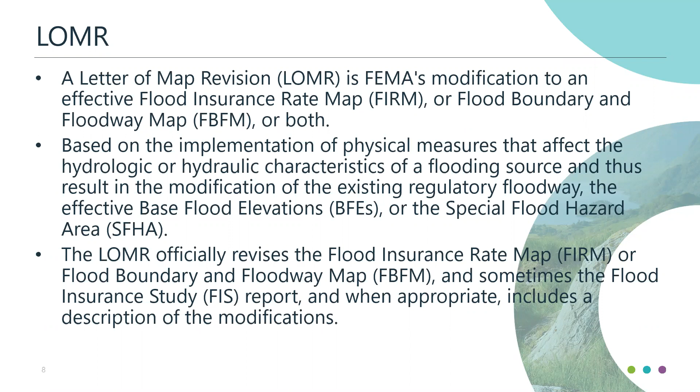A CLOMR is the other revision type, and it's a conditional letter of map revision. And basically what that application process is, it provides the ability for FEMA and the community to comment on a proposed project before anything is built, to make sure that it meets FEMA's regulatory requirements, the community's regulatory requirements, as well as the state's regulatory requirements. It's an important process because nobody wants to go out and do a lot of work, spend a lot of money just to find out that they're non-compliant. So a CLOMR is a very important piece of that.

If you're doing fill within a floodway, a CLOMR is absolutely a great step to make sure that you're going to be compliant before it's actually built. One thing to note with a CLOMR, just like a CLOMR-F before, a CLOMR being conditional doesn't actually revise anything. All it does is indicate whether or not that project, if you build it as you proposed, would be recognized by FEMA and could be approved once you do a LOMR. So the process generally would be to do a CLOMR first, get that approved, build it as you said you would, and then file for a LOMR and get the LOMR approved so that it physically changes the map.

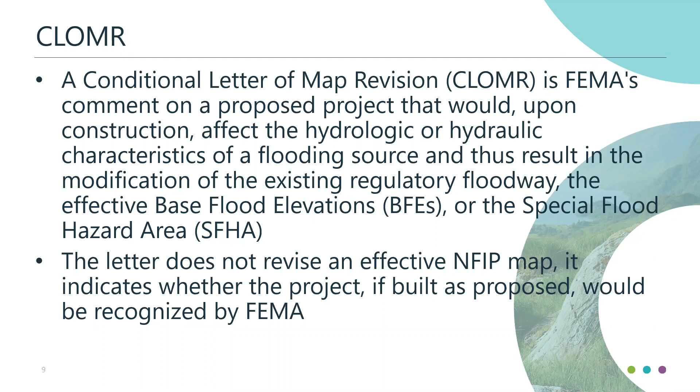Yesterday, I showed this table that depicts the different types of applications. The MT-EZ was a LOMA only. As some of you may recall, a LOMA is for those properties or structures that have not been placed on fill. They're at grade. And then the MT-1 applications that we talked about yesterday, those are all amendments, meaning they don't physically change the map. And those would include the LOMA, a CLOMA, a LOMR-F, or a CLOMR-F.

And just as a refresher, the LOMR-F is a letter of map revision based off of fill. In other words, it's a letter of determination determining whether a parcel of property or a structure on which fill was placed after the effective date of the floodplain would be above or below the base flood elevation.

Today, we're going to focus on the MT-2 applications, which are revision type applications. They physically change the map. And we're going to talk about LOMR and CLOMR specifically. PMR, as you might recall from yesterday, is a physical map revision, which is similar to a LOMR in its nature, except that it's at a larger scale. Multiple counties, large watersheds, things of that nature. I'm not going to focus heavily on the PMR process. If you have questions about the PMR process, I would encourage you to talk to Tara, Joanna, and Steve, the KDA folks, about that process.

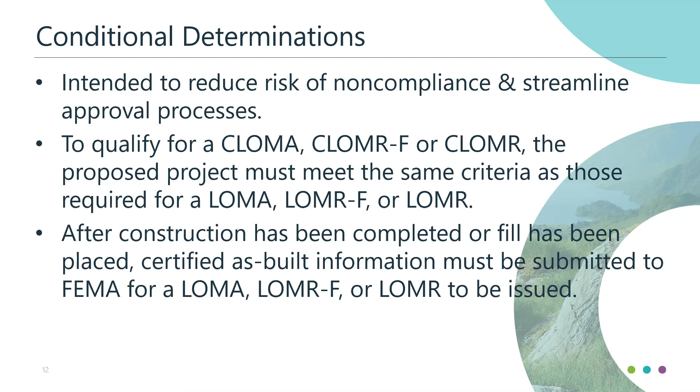How much does that application cost? As you can imagine, since we're talking about physically changing the maps, there's more review required of the hydrology, hydraulics, any structure information that you're putting in there, or specialty flood control item, whether it be a levee or a dam. Those types of things require more stringent review by FEMA and their partners. And so you can see here that they're quite a bit more expensive.

The CLOMR based off a new hydrology, bridge, culvert, channel, or combination thereof, is $6,500 to submit that application via the online LOMC tool that we talked about yesterday. If you are doing a levee or berm activity, the review cost of that activity goes up by a little bit, $7,000, but they also charge $60 per hour.

And the best way I can explain that $60 per hour is if you're dealing with levees or dams, there is a lot more involved with making sure, and we'll talk about this in a little bit, you're abiding by 44 CFR 65.10 levee requirements or dam flood control requirements. And so they actually will charge you on an hourly basis for review time on any of those type of applications, in addition to the $7,000.

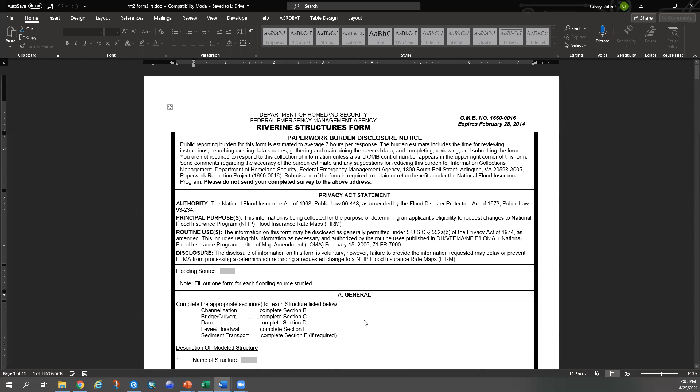Okay, none. Riverine structures. So our example doesn't have any riverine structures, but I'll just go ahead and walk through this. Flooding source is as it sounds before. Depending on the type of activity that you have, there are certain sections that you complete. So if you've got a project that includes channelization and bridges, then you could put those in here and you can select both of those as items, and then you would have to complete section B and section C of this form.

Name of the structure, what type it is. We kind of already went over what the types are and where they're located. Make sure to talk about what the upstream and downstream limits are of that chain. So if you're doing channelization, then you'll want to put the cross sections upstream and downstream where they start and stop. If you're doing bridges, you want the upstream cross section and downstream cross section placed there. And then similar to channelization, levees, upstream and downstream cross sections of those limits.

If you have more than 3, then you need to do another form for those other activities. And if you have a lot of them, you may want to just do one of these forms for each activity so that they're all accommodated. So for channelization, same information there. You talk about what the channel was designed to carry and/or what your frequency event.

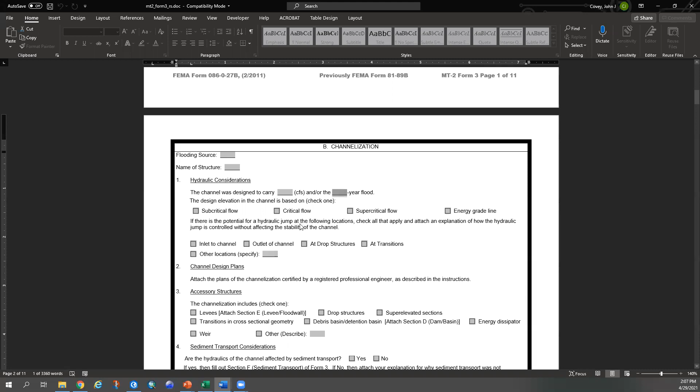There's a lot of engineering stuff in here that I'm not sure I want to get into for this crowd, but you check the different flow regimes. You talk about if you have a hydraulic jump in the modeling, check all those and how you're affecting stability of the channel. So you'll check all those. Make sure you put in the channel design plans. Again, that was in our little table before. So if you're doing a proposed project, you want the design plans included.

Usually if you have like a channelization and you have a sudden hydraulic jump where you have some stability issues, you may have other things like a drop structure or some other transition between cross sections or something to stabilize the channel. So you would check any of those that are applicable. Again, make sure they're included in the design plan so that they can review them. Sediment transport, again, if you have a lot of sediment transport in your study area, checkbox that.

Bridge culverts, this revision, it reflects if you're changing a bridge or culvert that wasn't modeled. So if you're adding one that wasn't modeled previously, you put it there. If you're modifying one that was in the FIS, you checkbox that. Or if the bridge hasn't changed, but you're revising how it's analyzed, you would checkbox this one. Put in the hydraulic model that you're using to analyze the structure. And then all this other information comes from your design plans that you fill out, especially anything that is changing. You'll want to checkbox all those. Sediment transport again.

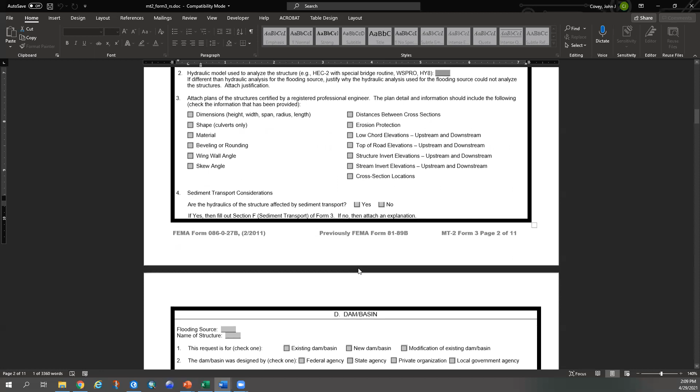Dams, so you have an existing dam that you're modifying, you're putting in a new dam or modifying an existing dam, whichever is applicable. So if you have an existing dam that was missed and you want to include it, that would be this one. If you have a new one, you go there. If you're modifying an existing one that was previously mapped, you checkbox that one. The dam/basin was designed, so who designed it? Checkbox that.

Usually if you're doing a dam, a lot of times you're revising hydrology, so you checkbox yes here, but sometimes not. Maybe the dam was already there, you're updating the dam somehow, but for whatever reason it doesn't change hydrology, you would check no. And obviously if you checkbox yes, you better have form 2. Was the dam designed using critical duration storm?

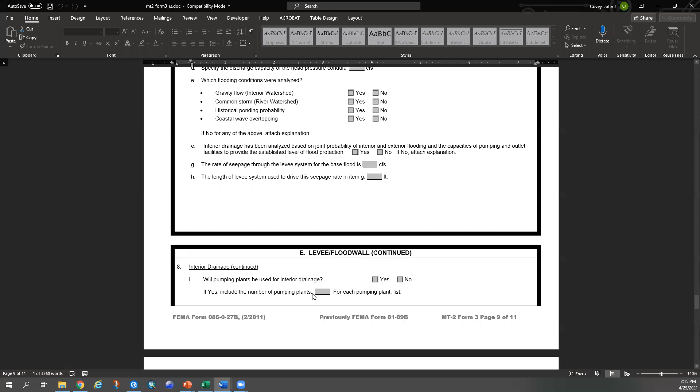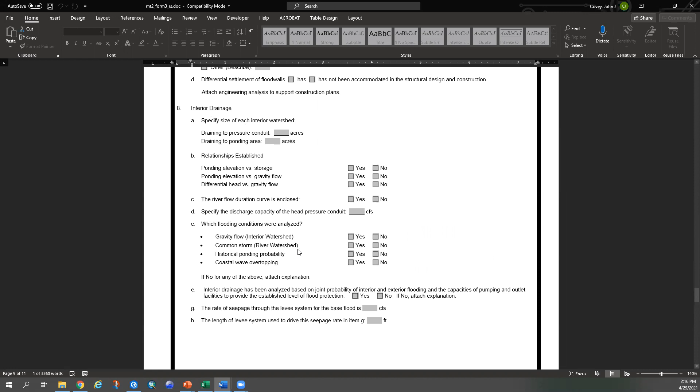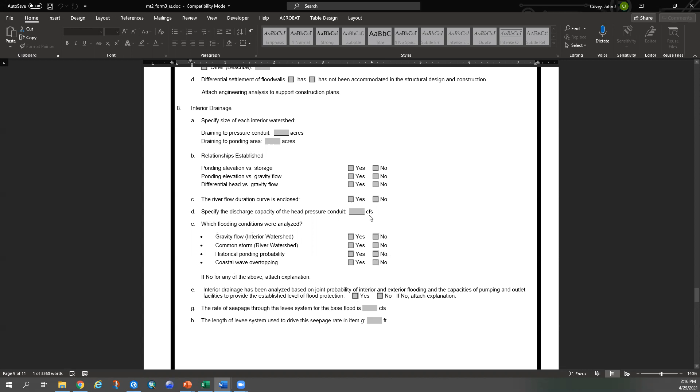Oh, one thing that's often overlooked is interior drainage with levees. That is a requirement. If you are changing even something in the channel part, maybe you're adding a little check dam or something, if it changes the riverine condition, you'll want to make sure to understand how the interior drainage is impacted. And interior drainage, basically, they're required per the CFR to map all the interior areas of the levee system, because if the pipes are closed, they want to understand what's at risk. So anything that changes that potential risk, they're going to want documented. That's what this section here is for.

And then there's the sediment transport finally at the very bottom there. Are there any questions about this form? There's a lot of technical stuff in here.

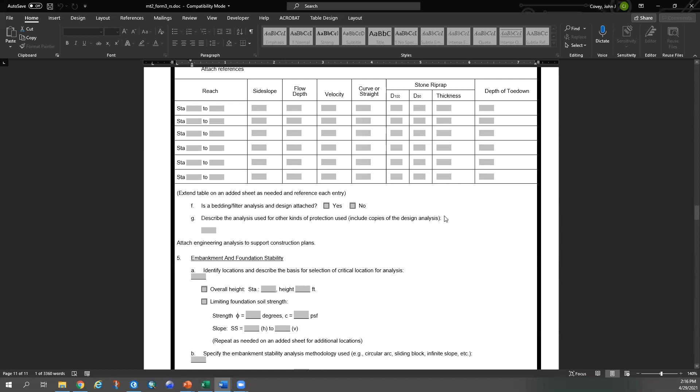Okay, hearing none. That was the last form that I wanted to go through in detail. Just know that there are the three other forms, the coastal analysis and those other ones. They're not really applicable to Kansas, so I don't want to spend a ton of time going through those, but they're here, and just know that they exist.

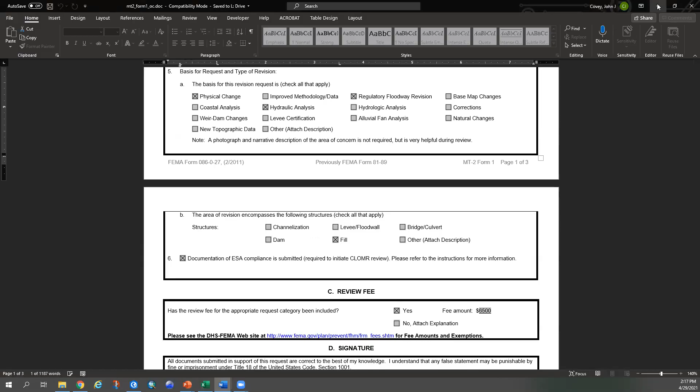If you're doing a snail mail option for the submission, this is where you would send it to, similar to the CLOMR-F and LOMR-F, LOMAs, or you can do it online, and it's usually quicker to do it online, as we talked about previously. You just have a lot more data to upload because you're uploading models, you're uploading design plans, you're uploading a lot of information.

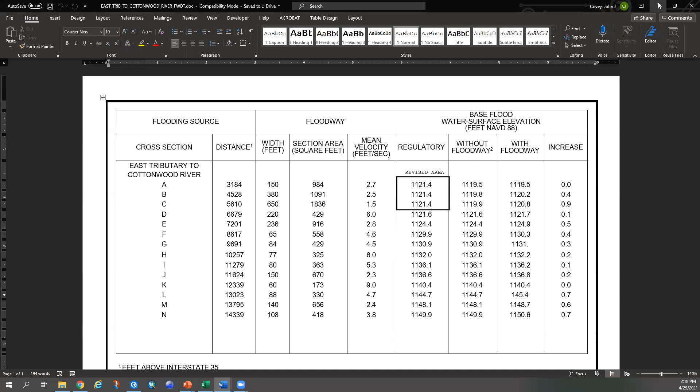One thing just to show everybody, whenever you do this, I usually will do it in the order of that table, and I'll have each of these documented. So like for the certified topography, I'll have the metadata in here, and I'll have a report that talks about it. If you're doing the mapping changes, so if I go to this proposed regulatory, let me just open up an example, so I'll box off the area that's changing and say that it's been revised. And I do the same thing for all the profiles. Any profile that's impacted, I'll do that as well. So you can see the box, and then I mark it as revised.

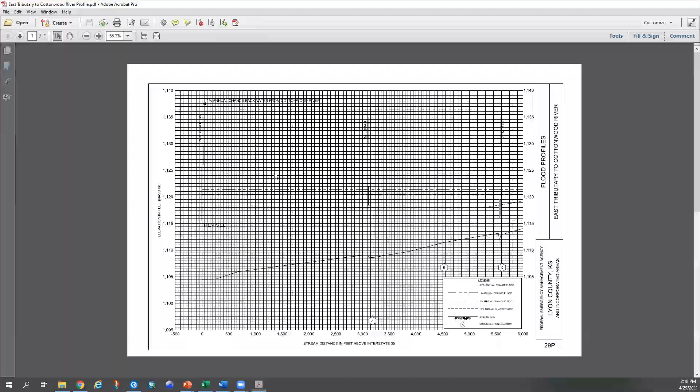Are there any questions about the forms or what's being submitted there?

Did I drown everybody? No questions in the chat, but we have a poll right now. Just to check if they're still awake, right? Can you hear me okay? Yeah. Okay, it was sounding weird to me. It echoed for a minute, but it seemed okay. I thought there might be an echo, but it's gone away. I'll go ahead and launch that poll.

And this is multiple choice again. So hint, it's more than one. So the question is, if you were to submit the CLOMR application for a proposed bridge in a Kansas river, what MT-2 forms would you need? Select all that apply. We'll leave this one up for longer since you have to think about it more. We'll leave it up long enough so that everybody can get a chance to. Yeah, absolutely. This one makes you think a little bit longer.

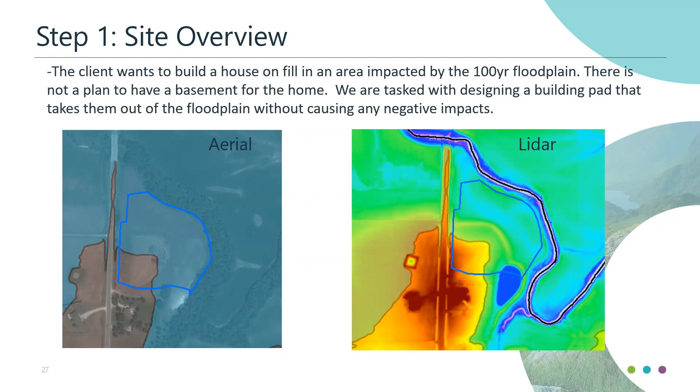Okay, let's get to the example. So we've got this site, we've got a client, he wants to build a house on fill in an area impacted in the 100-year floodplain. No plan to have a basement. We're tasked with designing the building pad, which takes them out of the floodplain without causing any negative impacts. This site just so happens to be in a floodway. So since it's in a floodway, that means we need to look at no rise, see if we can achieve a no rise. And if not, then we definitely are going to have to do a LOMR to make sure that we adjust the mapping accordingly.

So first thing we always do is that ESA evaluation. So I performed an IPaC analysis, sent a letter to the U.S. Fish and Wildlife, and basically determined that there wasn't anything of concern. I'll try to mitigate, as we talked about before, any migratory birds or endangered species issues. Make sure that we're checking for wetlands and communicating with both the state and the local government. Make sure that there's not any potential issues that anybody's aware of.

We'll try to obtain the effective model if one exists. If an effective model does not exist, we'll create what they call a duplicate effective model. In other words, we'll try to reproduce the model as it is on the effective if we can.

In this example here, the black lines that are shown, those are the cross sections from the effective model. And in this example, we were able to find the effective model. We have it, we downloaded it. And so that is what we're starting from. So we're not going to have to do a duplicate effective.

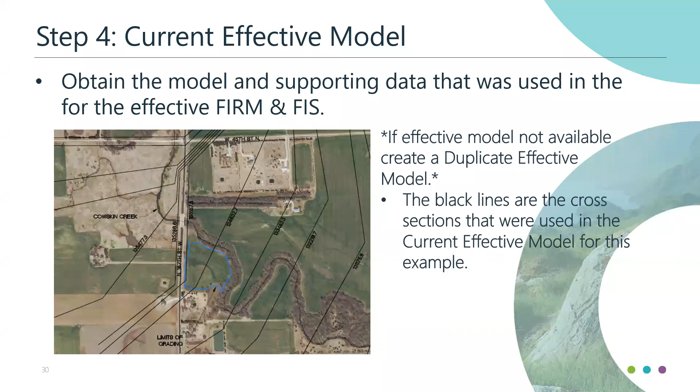And if that's the case, then you're usually talking about having to do a mapping update where you change the hydrology, hydraulics, and everything else. And you're probably not going to get a no rise based off of that. You'll want to do a CLOMR, let's just put it that way, because you want FEMA to give you comment on what you're doing.

Corrected effective is basically taking the duplicate effective model, or if the duplicate effective is the effective, you basically are updating that model so that you can better analyze the changes that you're going to make. So you're going to add cross sections. If you have any Manning's updates that you want to make, so roughness, any site grading changes that may have occurred, you're going to get that model updated to what's there today.

FEMA and the state do a really good job trying to make sure that they're mapping flood risk appropriately. But there are certainly cases between cross sections and things where they're not going to be able to analyze every single square inch of the watershed. I say all that, but now we're doing 2D modeling. That's a whole other ball game.

But in the 1D realm, understand that the point of the corrected effective model is to update it so that when you're doing a comparison back to it for the proposed conditions, you're comparing how it's going to affect the actual conditions today. If you're adding cross sections, one common thing I see engineers accidentally do is they don't update the reach lengths. Make sure to update those reach lengths when you do that.

And also try to keep Manning's consistent. So if you're adding cross sections, look at the Manning's upstream and downstream and try to be consistent with how that original study was done. Unless you see an error in how it was done, then update those errors.

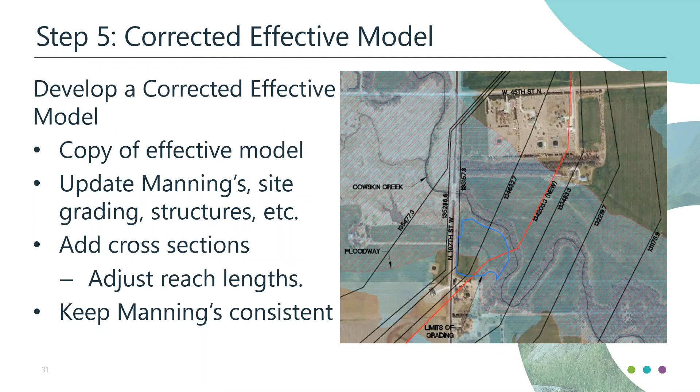So the first thing you do when you update that model is you rerun it, and we always compare back to the effective. And hopefully when you've done that, you don't see a lot of change. And oftentimes you don't, because the state of Kansas contractors, well, they're awesome. I don't know what to tell you.

So basically, you're going to look for a table that looks something like this. This table will actually go into what we call a floodplain impact study report that documents how the model has changed from the effective. And certainly minor changes are acceptable. There's no model out there that's 100% perfect. The whole point of this corrected effective model is to get it to what the true conditions are.

Usually you don't see a lot of change, but sometimes you will, and those need to be explained and written up why they are. And make sure your table ties in. So you can see how my cross sections have 0.00 at the downstream and upstream end. You want to make sure that those tie in when you're doing these evaluations, because again, that's a requirement for FEMA that it is tying into the effective study.

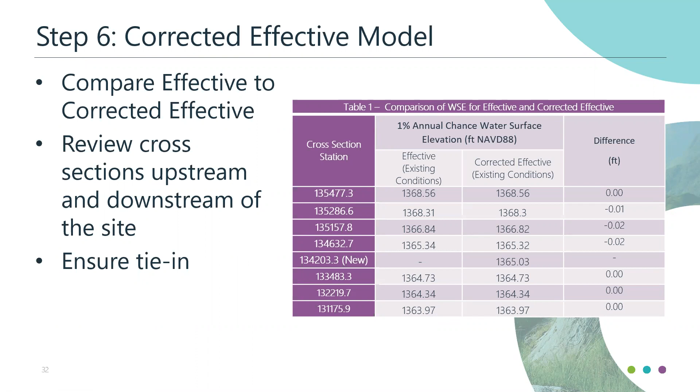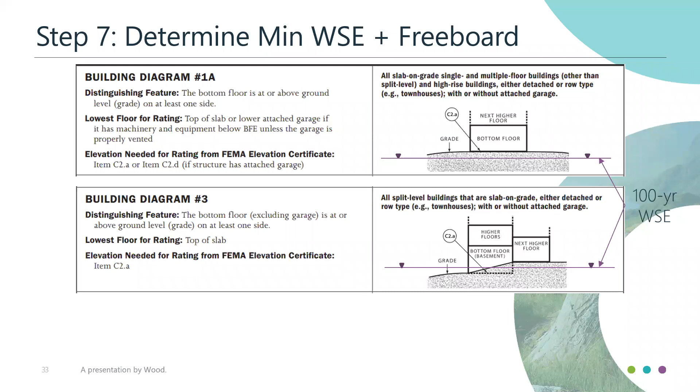Determine the minimum water surface elevation plus any applicable freeboard. Here in the state of Kansas, we require 1 foot of freeboard above the base flood elevation. So make sure that you are looking at the base flood elevation, you add 1 foot plus a little bit of fluff for compaction and other things. And that is your goal. That's the height that your pad needs to be set at a minimum so that you're within compliance.

Based on and knowing that, then we start laying in groundwork, grading plan. Because this is in a floodway, we're probably going to try to excavate certain areas and then put that fill, build up a pad using that fill material.

There are areas in the state of Kansas that have compensatory storage requirements, for example. So if you are doing an activity, whatever fill you put in the floodplain, you are required to take that fill out of that floodplain so that you're accommodating it.

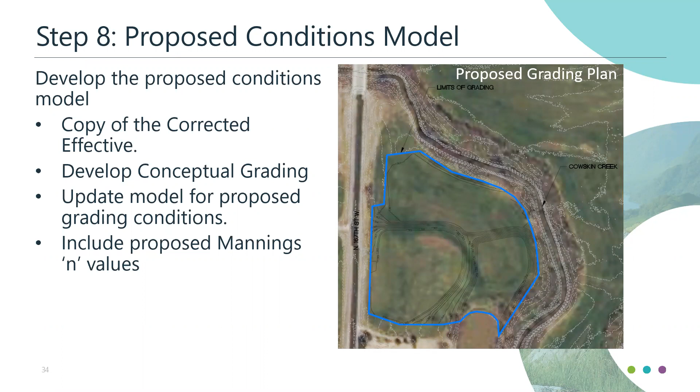So you'll take a copy of that corrected effective model and you'll put in your proposed conditions. You'll conceptualize this grading, and then you'll update the model based off of that new grading plan. Here's just a really quick example of how that might be done. So basically you can see where we're excavating out an area of the natural ground, and then we're taking fill and we're adding it off to the side there and raising it above the BFE.

We usually will have these example cross sections, and for each one we'll have an example just like this. And then we always do a net volume comparison to determine how much fill we took out of the floodplain and how much fill we're adding to the floodplain area.

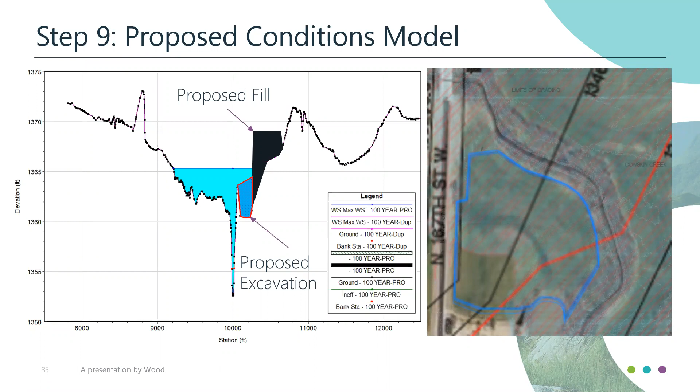Once you update that model and you run it, then you'll compare it back to the corrected effective model. And the goal is to have a net zero change in the water surface elevation so that the 1% annual chance doesn't rise. A common question I get asked is, is the no rise required for, say, the 10-year or the 25-year? And for most jurisdictions, the answer to that is no.

In fact, I'll just be honest with everybody. A lot of times when these studies are done, you actually will see a rise in the 10-year or 25-year, but that's not how FEMA reviews it. They review it based off the 1% annual chance. Just be knowledgeable though of your community regulations or the state that you're working in, and make sure that if they do require a no rise for all events, then you're going to have to check that for each event.

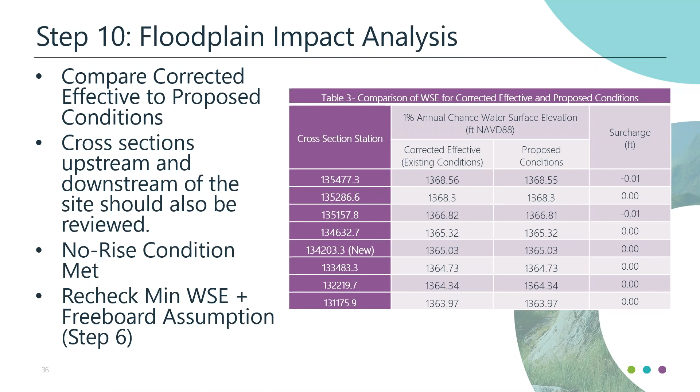Then I put this table together, and that table also goes into the report documenting no rise certification, essentially. In this example, the project is a structure elevated by fill within the regulatory floodway. So a LOMR-F is not applicable. The client can choose to file for a LOMR or a CLOMR. Since they have a no rise, they don't technically have to do a CLOMR, although it's usually recommended. Just keep that in mind.

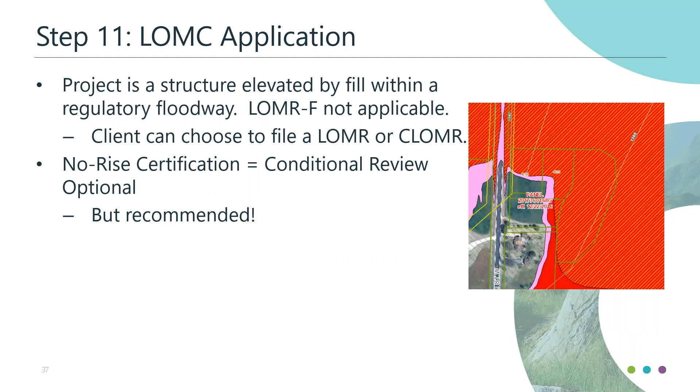One thing to note, as I mentioned before, let's say that the fill had been placed prior to the effective date, then technically that fill is grandfathered in and a LOMR-F could be applicable if you can prove the fill was placed prior to the study being done. That would be the only exception to this statement up here that I can think of, unless others can think of a reason why that would be true.

You would want that, in my opinion, just because you don't want neighbors arguing back and forth about it. It's just good practice to do it. I mean, what better letter to basically say, hey, this has been analyzed, FEMA has checked off on it, and they're good with it. It's just good practice, really.

So I'm going to skip this. We've already kind of gone through those forms. I showed you the examples that we had for this project. I guess we're on our last poll. Yes, you should be seeing the last poll now.

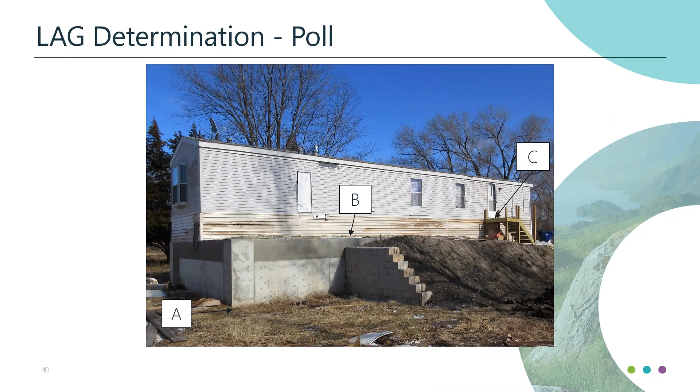But technically, I think based off of the guidance, B is actually the correct elevation, which there's two mindsets there. There's the regulatory, what FEMA is evaluating, versus the engineering. And yeah, that A is very important, because if that wall falls over, the whole thing's done for. But yeah, B, quick answer. Okay.

So some lessons learned that I just want to talk about, and I would like to open this up to see what kind of things people are seeing and what kind of questions they have as we go through this. But the first thing is just make sure to provide that project narrative. It's very important. People tend to overlook that. The more information you can provide, like I said, it helps really confine what the reviewer is looking at.

Some of those reviewers are very technical people, and they can kind of tend to get in the weeds and start chasing rabbits down rabbit holes. Clearly define the limits for which you believe the impacts are, so that they can streamline their review process. And make sure to really document that all the information has been provided. I'm a very checklisty type person, so make sure you have a checklist and you go through that and you sign off on all those.

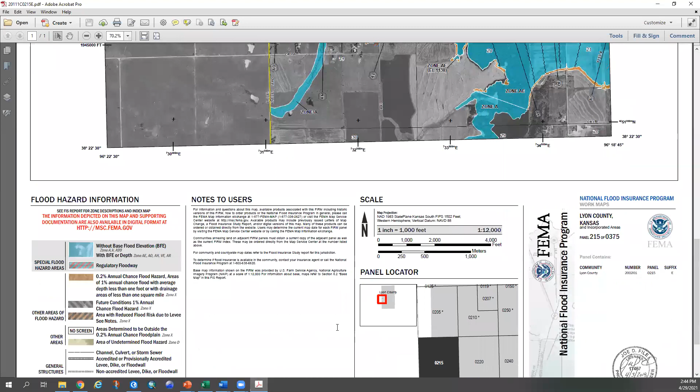We talked about this. Make sure your floodplain ties in to the effective floodplain within 1/2 foot. In this day and age, as digital as everything is, there's no reason why we shouldn't be even closer than that. If you can't, and there's a reason for it, you need to document that. And that definitely is something that should hopefully be coordinated with the state, so that the state knows it, and maybe there's a mapping update that needs to be made, as well as the FEMA updates.

So one thing that could happen is somebody does a no-rise, they don't do a CLOMR, and they just do a LOMR, and then they find a mistake in the no-rise. Maybe FEMA reviews it and they say, nope, you can't do that, you should have had this change, and you find out by making that change, you no longer have a no-rise certification. So this is a really good example of why doing a CLOMR is usually a good idea.

I pretty much always recommend that a CLOMR gets done. Certainly there are clients that don't want to do it because they don't want to have to pay the multiple fees. I understand that, but we just want to make sure that we're trying to protect them, that we're trying to protect the community, the state, because nobody wants to see something done that's in non-compliance and then a whole bunch of people get in trouble for it.